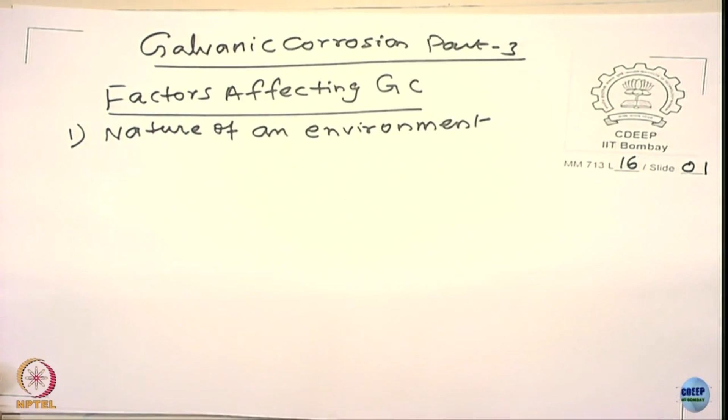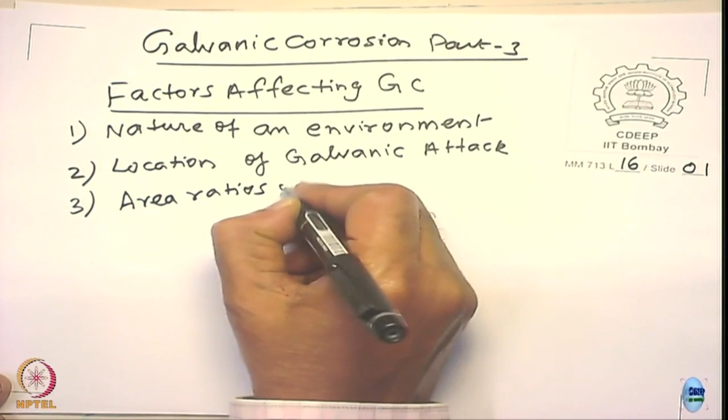The more obvious one is the nature of the environment. The second is location of galvanic attack. The third, since we are using two different metals with different chemistry and different electrochemical parameters, the area ratios are very relevant, very important - the area ratios of anode and cathode.

So we shall go into details and try to understand. If you understand the factors controlling galvanic corrosion, it will be much easier for you to devise means of controlling it. That is the whole basic idea of analyzing these factors.

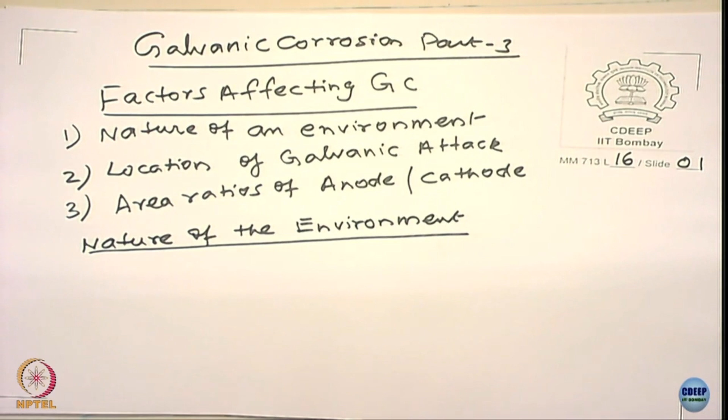Let us start with the nature of the environment. We can say as the severity of the environment increases, the galvanic corrosion also increases. The vice versa is also true - if the environment is quite mild, then the galvanic attack becomes relatively slower.

Now we can have a few illustrations to demonstrate how the severity of the environment influences this. I give two examples: corrosion in magnesium sulfate, which is relatively a mild environment, and corrosion in sodium chloride solution, which is relatively a severe environment. Take the two metals steel and zinc. If you look at the corrosion rate of these two metals in uncoupled and galvanically coupled conditions, you will see how the corrosion of zinc, which is more active, would change.

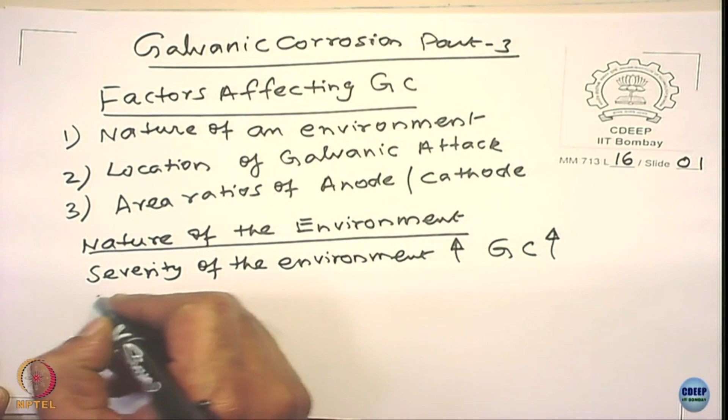This would change significantly if the environment becomes very severe. This data is taken from the Fontana book, just to give you a feel for it. Let's take the case of 0.05 molar magnesium sulfate. Zinc virtually does not dissolve and corrode, while steel corrodes.

When you galvanically couple these two, you notice that zinc corrodes at a higher rate and steel in fact shows a marginal improvement in weight - a weight gain. But this weight gain is not because of growth of steel or iron. It primarily happens because when you make a metal the cathode, the pH goes up and some deposition occurs. So if you clean them up, you would not see any significant increase in the corrosion rate. This rise in weight is not related to metal deposition here.

As opposed to this, you take 0.05 molar NaCl solution - both the steel and zinc corrode. Both corrode, and in fact the corrosion rate is almost the same, primarily because it may be diffusion controlled. The diffusion control does not depend upon the corrosion tendency of a metal.

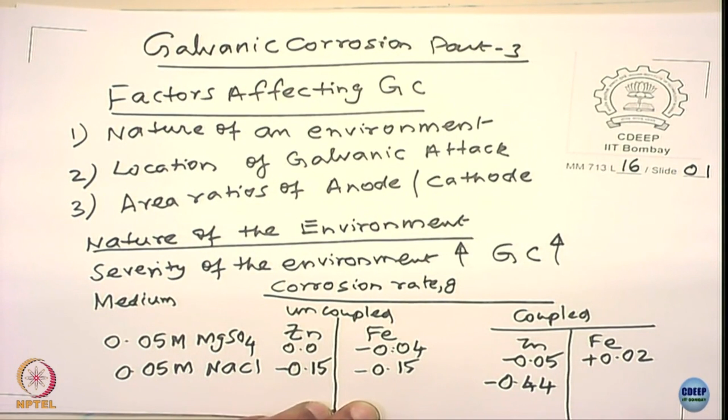In the coupled conditions, you see that zinc corrodes at a much higher rate and steel does not corrode at all. So the corrosion rate of the relatively active metal here, the zinc, is very much dependent upon how severe the environment is, and sodium chloride proves to be very aggressive in nature.

There are also cases where the galvanic tendency of the metal changes if you change the temperature or concentration. It is possible that at a given temperature, pressure, or concentration, one metal acts as active and the other acts as noble. Slightly change the temperature, and the metal which is active turns into a noble metal. These things have practical relevance and importance.

We give some examples. Let us take the case of steel versus zinc here. And all of us know that in galvanized steels, the zinc coating sacrifices itself and the steel gets protected.

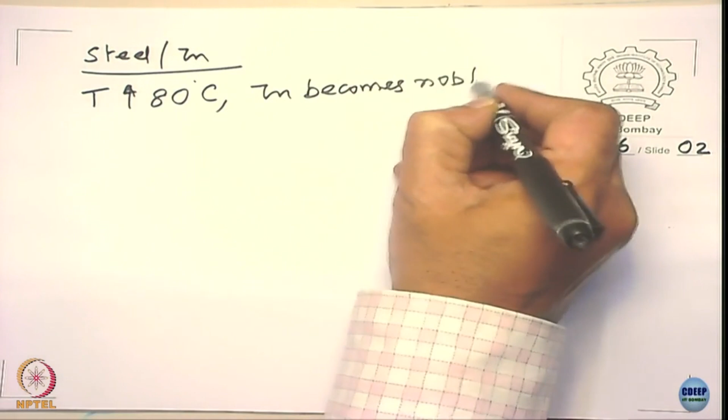But if the temperature of the coating is increased, if the temperature goes beyond 80 degrees Celsius, zinc becomes noble and iron/steel becomes active, and this is called galvanic reversal.

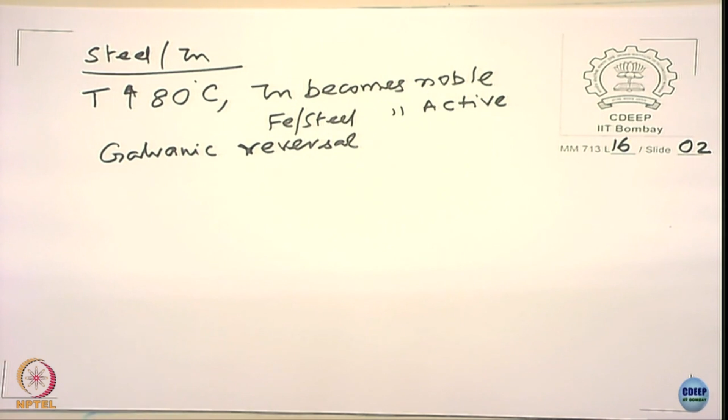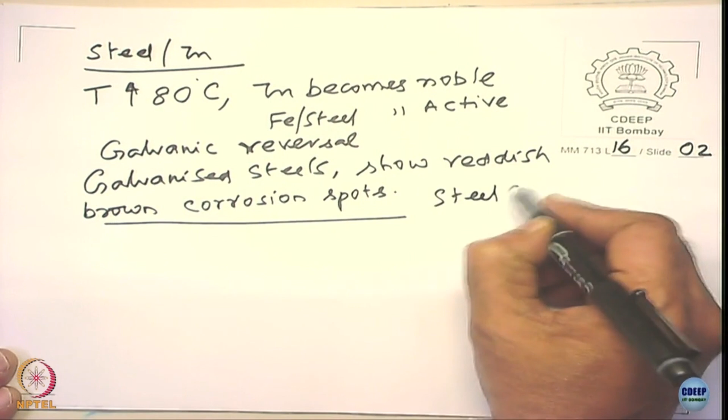Such a phenomenon has practical problems. One is, we have seen that the galvanic corrosion of steel, if the steel is galvanized - here steel corrodes. One more example which is relevant, which we will discuss a little later, is the application of zinc as sacrificial anodes.

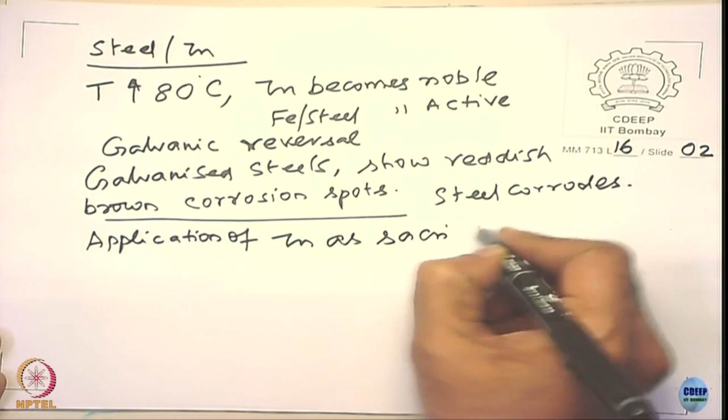In a cooling water system, it is not possible beyond 80 degrees. Why? The zinc starts passivating, it loses its protective nature, in which case you may have to use magnesium, or anyway zinc is not going to work.

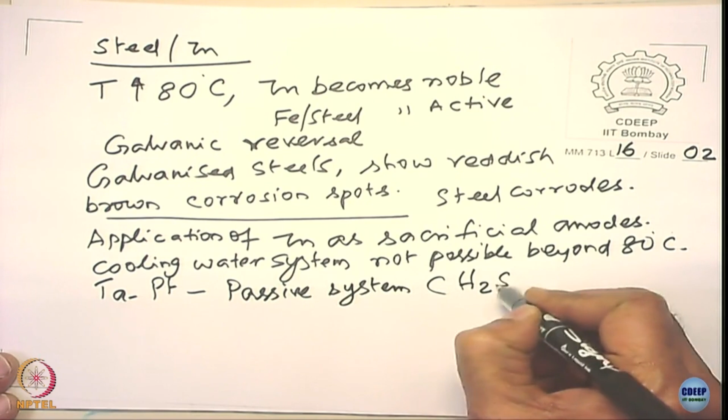There are a few more examples which are very interesting. You take tantalum and platinum. This is a passive system. This is, let us say, sulfuric acid, and you do not see any galvanic current until 110 degrees Celsius temperature of the sulfuric acid. You have no problem, you can have platinum and tantalum coupled together, it does not give any galvanic corrosion rate at all.

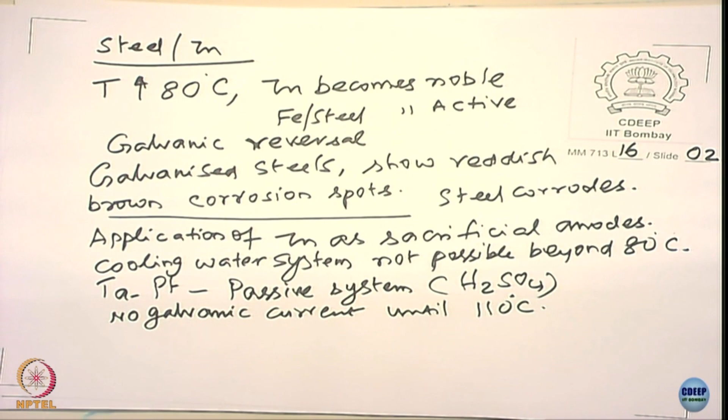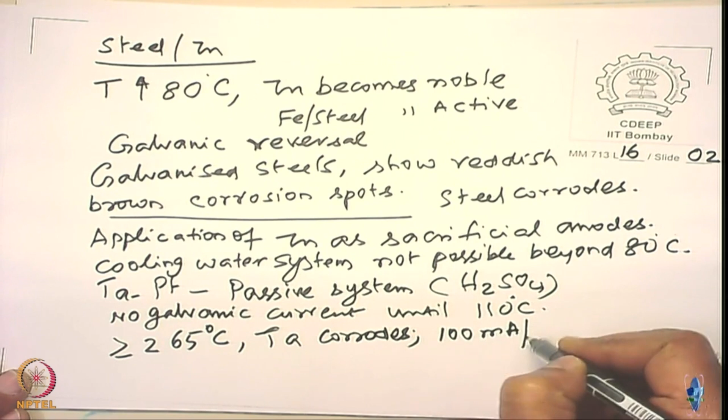But if you raise it above or equal to 265 degrees Celsius, tantalum corrodes, and you will see a galvanic current of about 100 milliamperes per square feet. The tantalum turns into an active metal, whereas the galvanic corrosion was not operating at all before.

As one more practical example, the tin-coated steel containers for storing food, like beverage cans. If the food, let us say juice, for example orange juice or apple juice, decomposes and gives rise to organic acid, it attacks tin complexes, and the tin becomes active. Otherwise, tin is a noble metal compared to steel, so that is not going to work. Now the tin starts corroding because of the complexing. So such kind of galvanic reversals are of importance in industries and should be studied very well before you select the system.

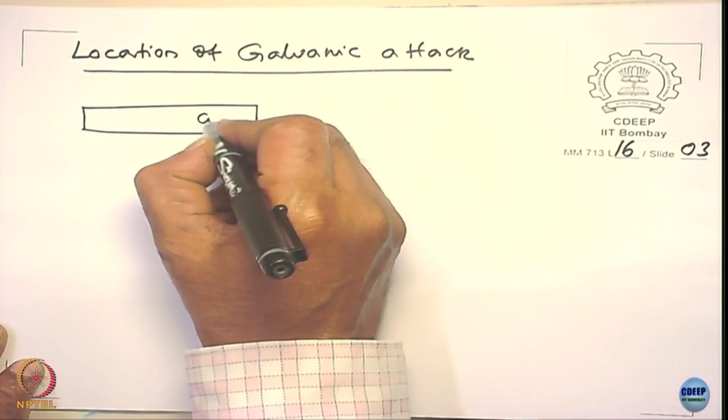Let us look at the location of the galvanic attack, it has a very important relevance for us. Let us take an example of copper and steel, exposed to the environment. You know that this is the anode, and electrons move like this, and there is going to be H plus or oxygen, whatever comes, and hydrogen is getting liberated. Agreed? This is what happens.

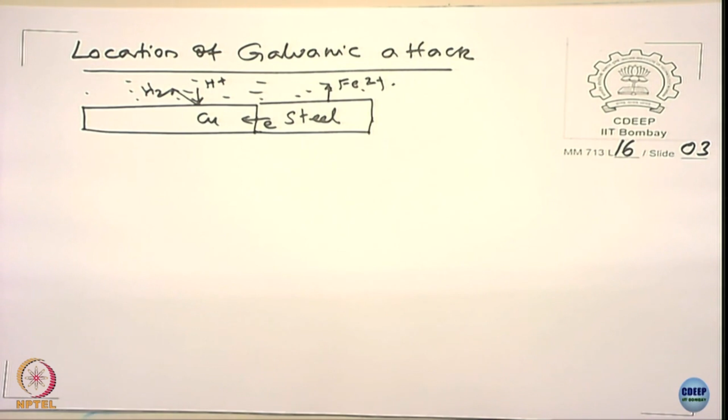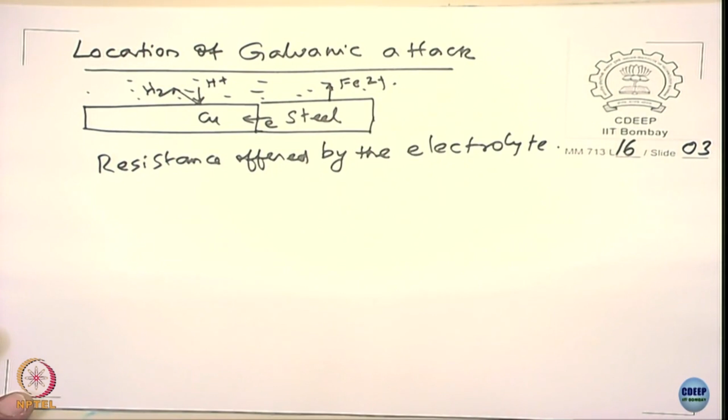Now you tell me, where will the galvanic attack be severe in this case? The most severe is at the interface, right? The galvanic corrosion will be more severe at the interface. Why is it more severe at the interface? The answer is correct, but why? Consider: the potential difference between this point and this point remains the same, that is going to be almost independent of distance. What comes into the picture here is the resistance offered by the electrolyte. So the current flows like this: electrons flow this way and current flows in the electrolyte.

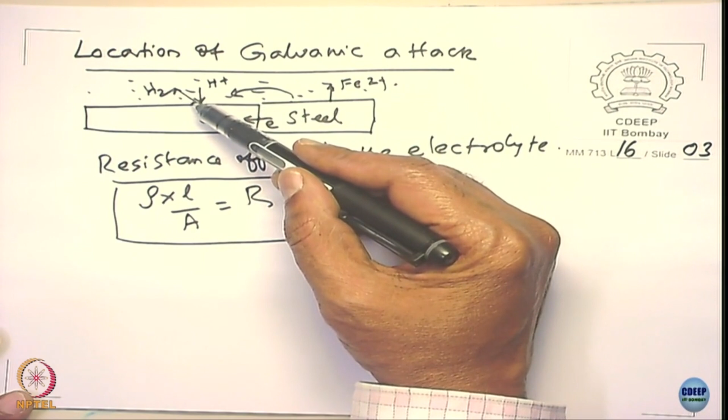So if the current has to flow from this end to the farthest end, the resistance increases, and the quantum of current that reaches this place will be less compared to the quantum of current that reaches the interface. Because the resistance depends on what? The resistance depends upon rho L upon A, that gives you the resistance: the resistivity of the electrolyte, the length over which the current flows, and the area or cross section over which the current flows. So as the distance increases, the quantum of current that flows reduces, and the amount of corrosion current decreases from this point to this point.

So that means if the resistivity of the electrolyte is increasing, what is going to happen? Assume there are two electrolytes, one with higher resistivity, the other with lower resistivity, and you observe the attack, and what kind of attack difference you will find. The same copper and steel, one with higher resistivity, the other with lower resistivity. What kind of differences do you see by just observing them?

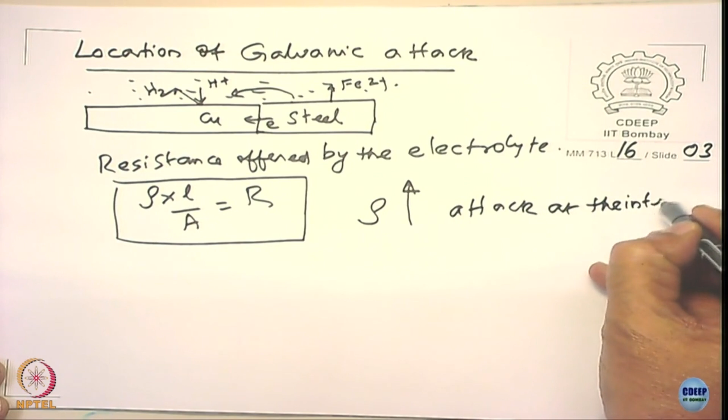That is true, but between the two, the resistance is higher in the electrolyte, in that case it will be higher. So when the resistivity is more, the localized attack is more, and the attack is confined to the interface, right, more than the attack at the interface phase becomes high.

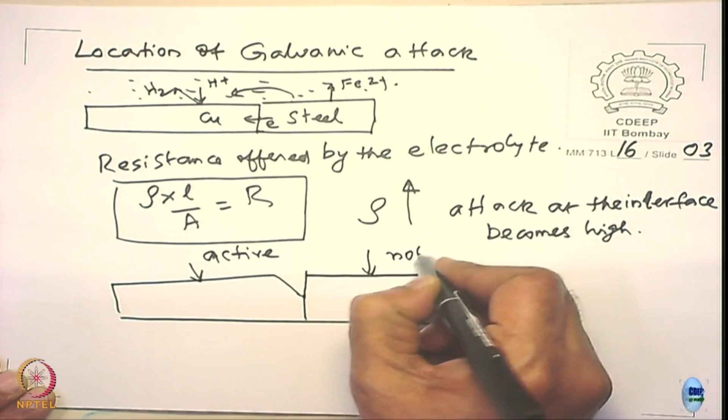In fact, this is one of the characteristics of galvanic corrosion. If you want to diagnose a problem, if you see in the industry that there are two different sets of metals which are electrically shorted, and you want to show that there is galvanic corrosion, the first criteria is that the interface should have a deeper attack. In fact, the attack will be something like that: this is your active metal, your relatively noble metal, right.

On the other hand, assume that I have a pipeline, and in that pipeline there are two different metals. One side is relatively active, the other side is relatively noble. The fluid is going inside and it is corroding. If the corrosion is away from the interface and is severe, would you call it galvanic corrosion? And it happened in the active metal, right? Would you call it galvanic corrosion? Do you get my question?

The pipeline carrying corrosive fluid has got two parts. Part 1 is active metal, part 2 is noble metal, and they are electrically shorted at the interface. The pipeline leaks. You found that the leak has occurred at the anodic member of the pipeline. But you also notice that the leak is not at the interface, it is about 10 centimeters away from that, or 5 centimeters away. Would you call that galvanic corrosion?

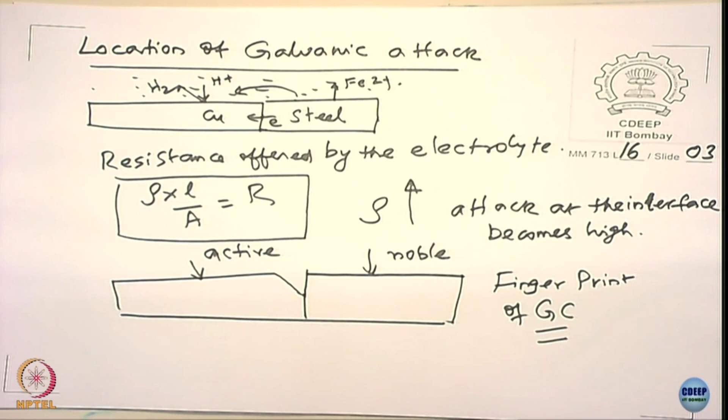Let us go into the next important aspect of it, the area effect. It is very easy to understand, and it is very impactful in designing structures to avoid galvanic corrosion.

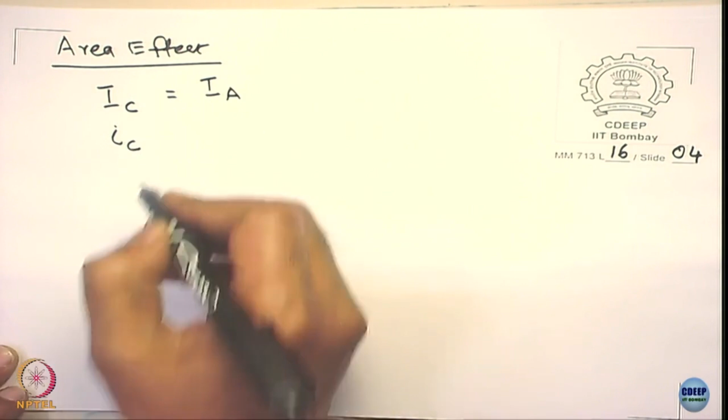Let us look at the mixed potential theory and see whether it helps us. We know that total cathodic current is equal to the total anodic current, right? It cannot really change. Now, what is this equal to? This is equal to current density multiplied by the area of the cathode, which is equal to current density at the anode multiplied by the area of the anode.

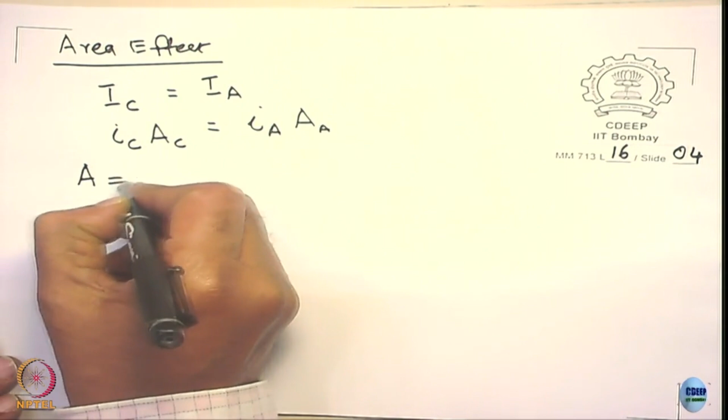Agreed? Okay, you know what it is, right? A represents area, and the other variables you are aware of. Let us rearrange this equation, equation 1, equation 2. See, what do you understand from this equation?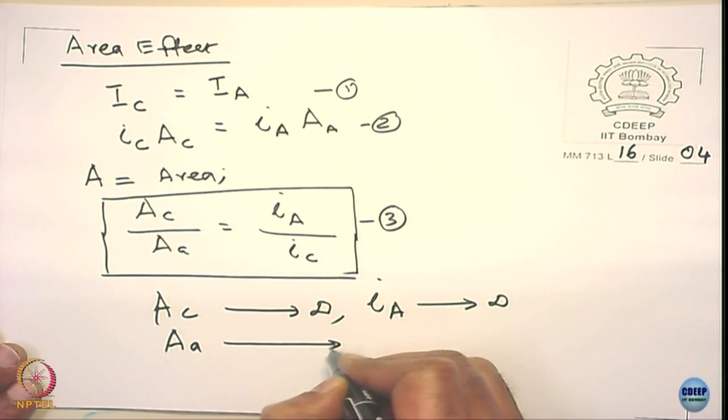If the area of the cathode becomes very high, the corrosion current density on the anode is going to be high. So that means if the cathode tends to become infinity, IA is going to tend to become infinity. When I say IA here, I mean the increase in corrosion rate due to galvanic action. On the other hand, if AA tends to become infinity, IA tends to become zero due to the galvanic couple.

Understood? So what does this really mean in practice? If you are an engineer constructing a component, what should be the design criteria? You should take care that when choosing materials, if you have no choice but to use two metals, you should always ensure that the anode is larger and the cathode is smaller. The vice versa could be a real problem. This can also be seen by the mixed potential theory.

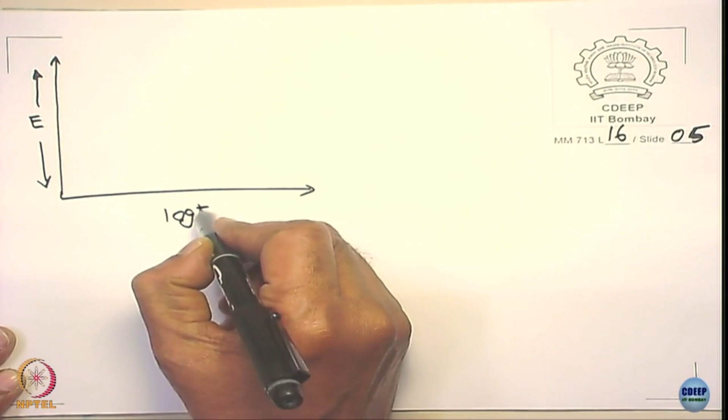Let us look at the mixed potential theory and see whether it is correct or not. I am putting log capital I here, not small i. Capital I means current, right. Assume that this is steel, and its ion going as Fe2+ in acid.

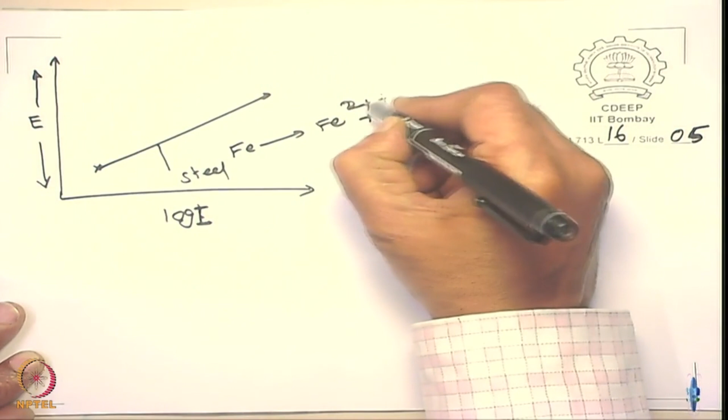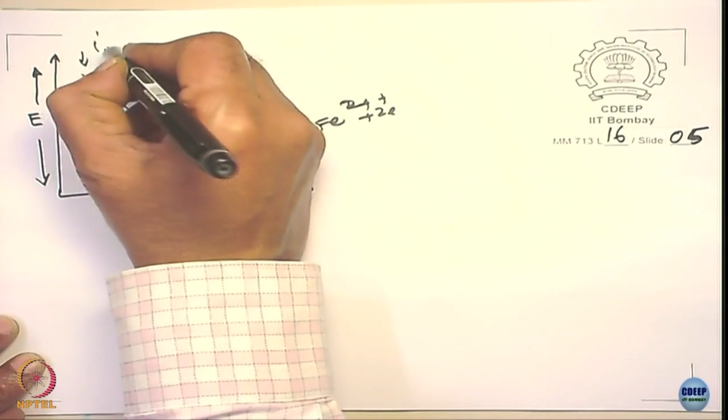I have the area ratio of iron and platinum equal to 1. I am not showing the cathodic curve corresponding to steel because the hydrogen evolution on steel is lower compared to hydrogen evolution on platinum, but you can show it here too. I naught H plus H on steel, then you can use platinum. This area ratio: steel is 1 centimeter square, platinum is 1 centimeter square.

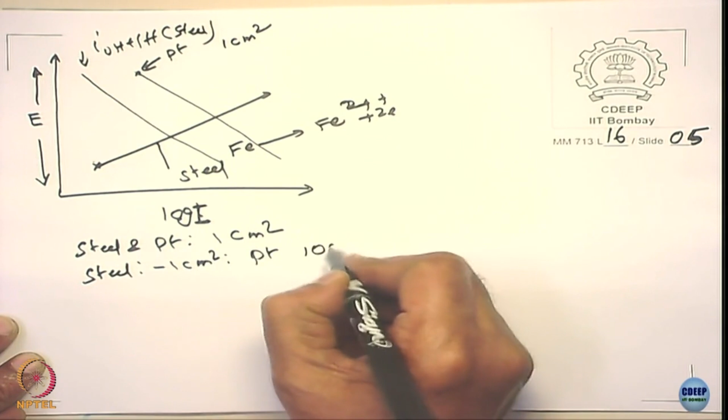I make platinum about 1000 centimeter square. When I make it 1000 centimeter square, please note a small change here - you cannot use I naught, it should be capital I, because we are talking about the actual area, not the normalized value, we are talking about actual current. So if you multiply by the area, it's going to be like this.

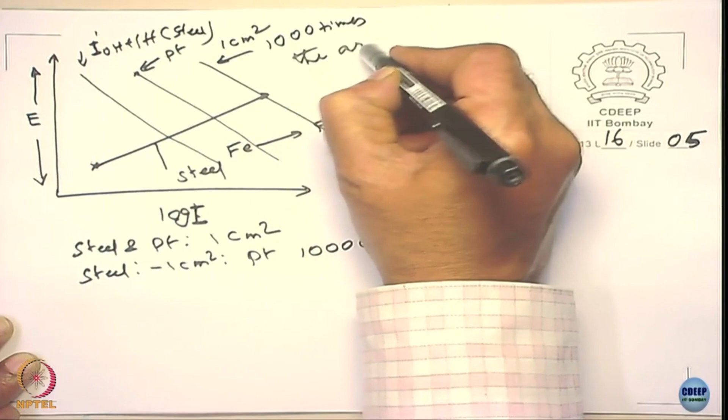This is 1000 times the area. So the corrosion rate would increase because of the galvanic action. And this has some practical implications. I just repeat the illustration given in Fontana's book - it is not too concentrated, but it is reasonably concentrated sulfuric acid.

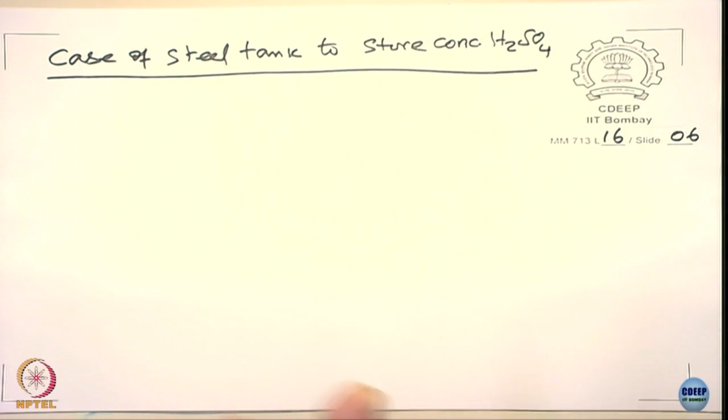See, very highly concentrated sulfuric acid, okay, you do not need anything. The steel offers very high resistance to corrosion, but with moderate concentration and dilute acids, the steel corrodes heavily in sulfuric acid. So how does the steel...

...become resistant to corrosion? You apply a coating, you call it a lining actually. You give an epoxy lining. The difference between a lining and a coating is the following: the coating is normally given to prevent corrosion of the metal, but the lining is given not only to prevent corrosion of the metal, but also to see that the product does not get contaminated.

So you may allow the metal to corrode, because you can replace it, but if the sulfuric acid has got too much of iron corrosion products, there is no use. So, the lining is generally meant to prevent corrosion to the extent that the corrosion products do not contaminate whatever process fluid you are talking about.

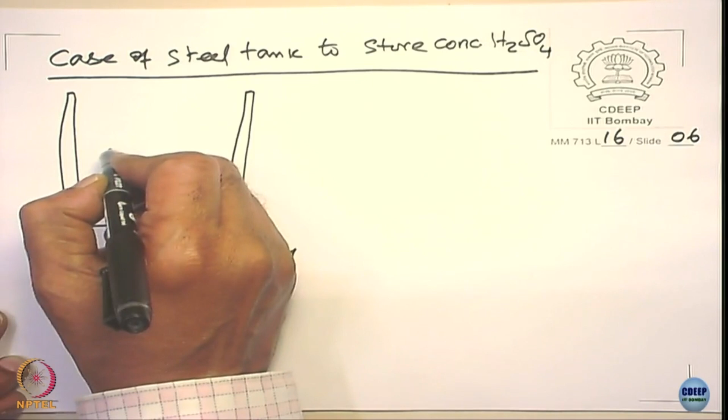Now, initially a steel tank was used, and they had an epoxy lining, and this is sulfuric acid. It is working well, okay. It gave a few years of service, okay.

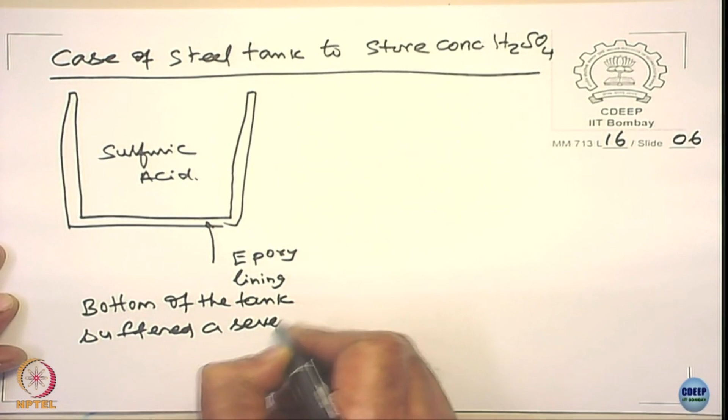There is no problem. But what happens is, there is always mechanical damage, people want to clean the tank. So when you start cleaning the tank, the bottom of the tank more often suffered severe corrosion, but it lasted for a few years. Seven, eight years it lasted.

And they found that the corrosion is more often on the bottom, more due to mechanical damage during cleaning. They thought they could line this tank with stainless steel. Stainless steel is harder and mechanically quite sound, and you do not have to worry about mechanical damage. When they wanted to do a lining of stainless steel, they thought, okay, let us not line...

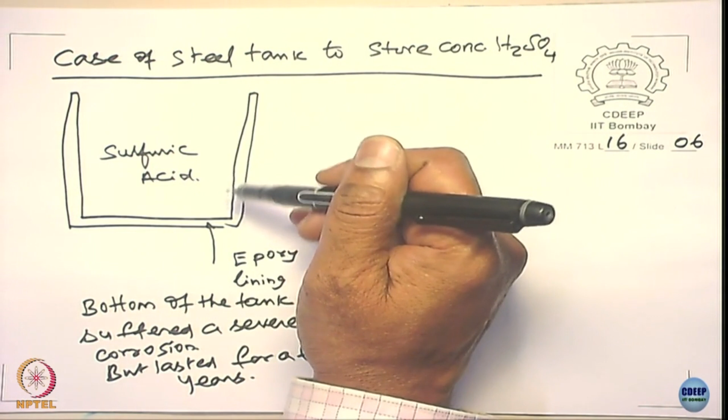...the tank completely because it costs more. See, many of the tanks are very, very big, right? You can save money by reducing the lining, since the corrosion happens anyway only at the bottom of it. So they started giving a lining in this manner.

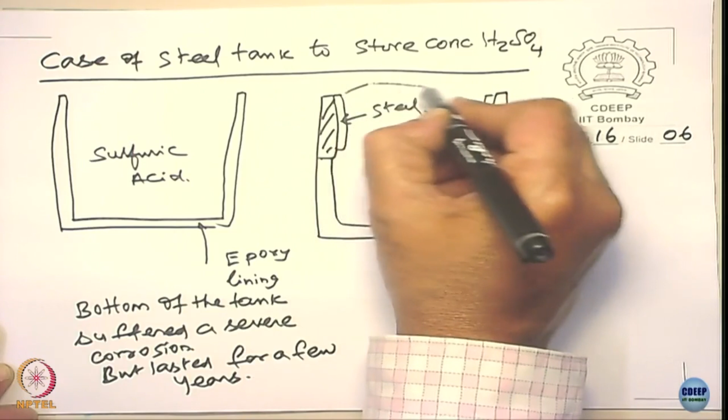They gave a lining to this, and the top portion was steel, and the tank is coated. It is not really well drawn anyway, it is a paint. This is painted.

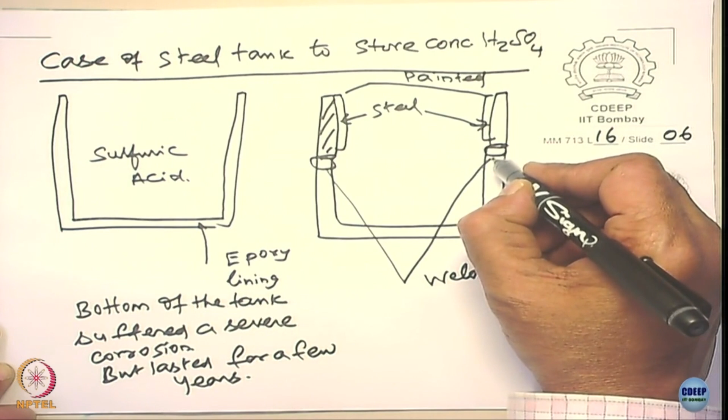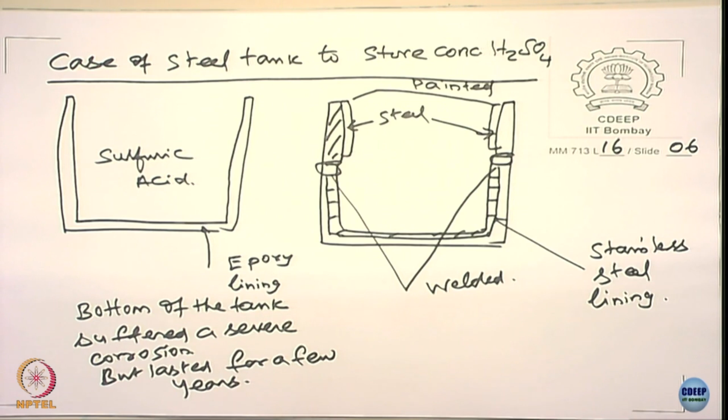How do you line it? And this is a place you weld, right? Welded, and you can see, okay, you can make it a little more neat. This is stainless steel lining. Stainless steel lining is done. Interestingly, this is sulfuric acid.

Now, the tank failed, very shortly. And where did it fail? It failed at the weldment. Now, you see here, you spent on stainless steel, a very expensive lining. Despite that, the life is very short.

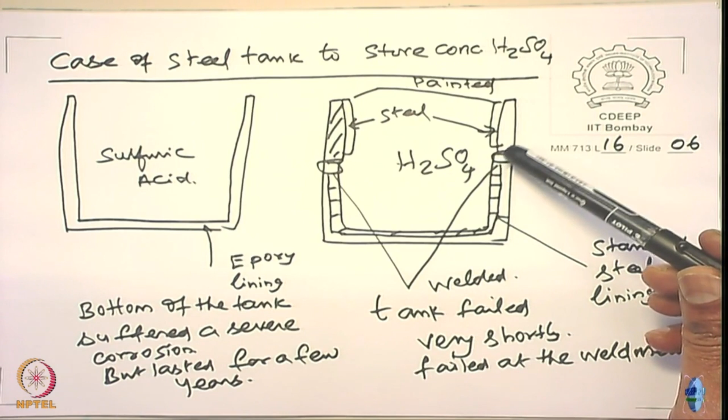Very interestingly, the guy diagnosed saying that the painting is bad, and so the tank failed because corrosion occurred at the paint, and this place is welded here, right? And when you weld it, painting is always difficult at the welded location. Normally you grind very nicely and then you paint. So the person said the failure happened because of improper painting, and they went on to say that we should redo the painting.

But some wisdom prevailed and they tried to look at why it failed, why it really failed. Before I go into that, can anybody guess or find out why it happens?

There is a small failure in the paint, so the area of the anode will be very small compared to the large area of the cathode. Fantastic. The paint can never be impervious, it is always porous. When the paint is not impervious, it is porous. Now what happens? There are very finite, small locations where you have an anode. Not only that, you have a lining which is stainless steel, which acts as a cathode. That cathode is of infinite area compared to the very finite anode below the coating defects. So, very highly accelerated corrosion takes place. So, the reason is simple. What is the reason? The reason is a defective coating, and then what happens? You have area of cathode upon area of anode tending to become infinity.

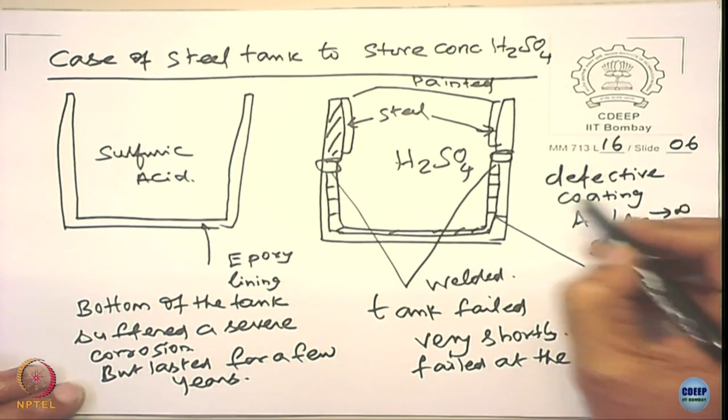Why did it fail? There are several such cases explaining why coatings ought to be given - only on the cathode if you cannot coat both, or you coat completely. Suppose the guy has coated completely both anode and cathode, then what happens? If there are defects in the paint coating at the cathode, even if small in number and small in area, there's no problem.

This leads to the understanding that if you have dissimilar metals, you should coat both the anode and cathode. If you cannot coat both, then we coat only the cathode. If you can coat only the cathode, you will have a very finite area of the cathode, so the galvanic corrosion becomes very minimal and you would not have any problem at all. So coat both anode and cathode, or if not possible, coat only the cathode and not the anode.

So such surprising conclusions come out of understanding the parameters affecting corrosion. We have now seen the factors affecting corrosion, and you should be able to propose how to prevent or mitigate galvanic corrosion. I want a very quick answer - let's move forward quickly. How do I mitigate galvanic corrosion?

Avoid use of dissimilar metals - that is simply not possible in many cases, like heat exchangers. If I have to use them, what is the first criteria? What do I look for first? I look for the anodic area. But if I can choose metals, I look at the galvanic series.

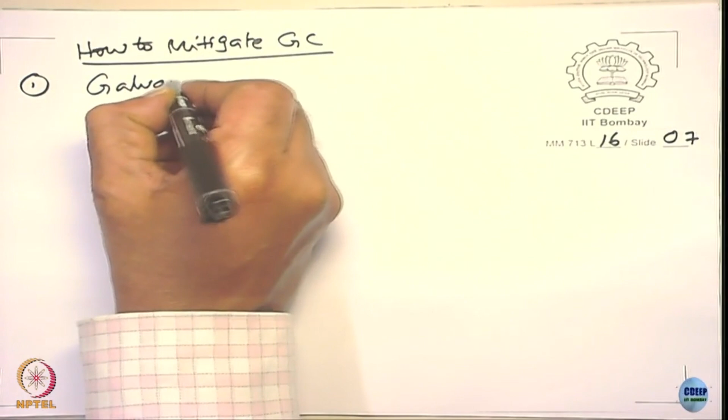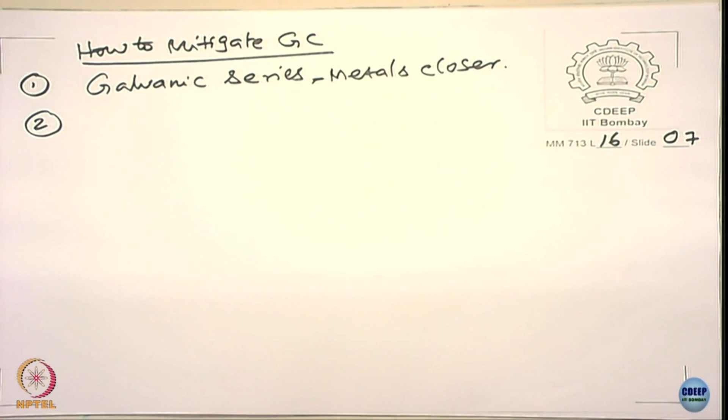Choose metals closer in the galvanic series. What more can I do? I can also look at higher anodic to cathodic area ratios, where possible, you can look for a higher anodic to cathodic area ratio. Then what happens?

I can isolate electrically - I can insulate electrically. Please look at this where possible, it may not be possible everywhere. What else can I do?

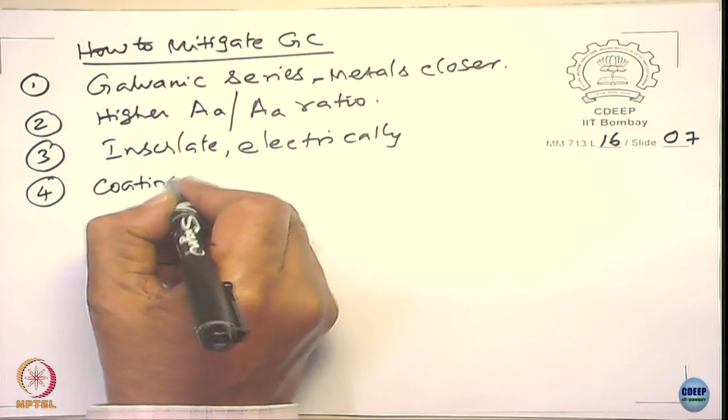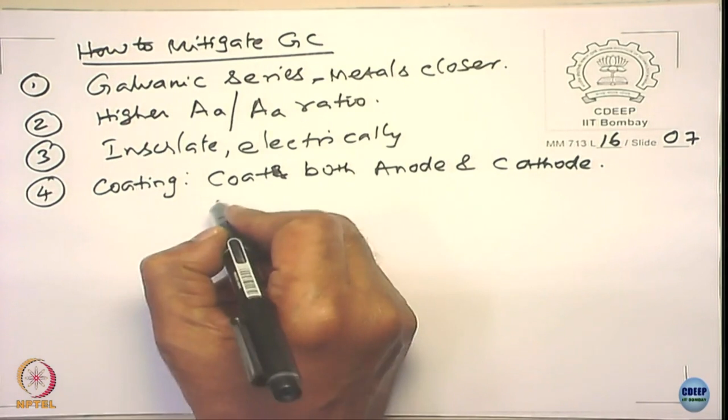Coating, right? Coating - it's an important lesson here. What is the lesson here? Coat both anode and cathode. If not possible, coat the cathode.

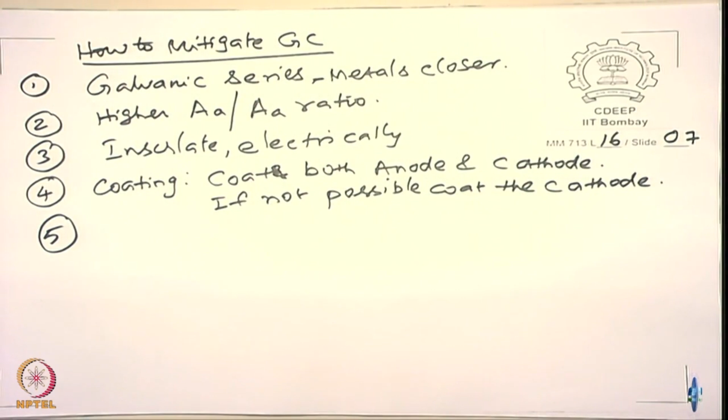We also had one more lesson in terms of effect of environment on galvanic corrosion - more severe the environment, more severe will be the galvanic attack. So how do I reduce the corrosivity of the environment? Use inhibitors. This is done in cooling water systems, where people add inhibitors.

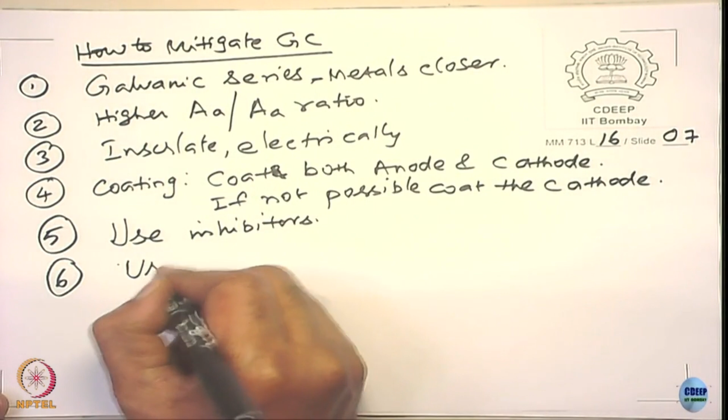What more can you do? You can use a third metal, one that is active to both. This is used widely in industry, mostly practiced this way. I've given this figure before - it's a heat exchanger, called a header or water wall box. These tubes are generally stainless steel.

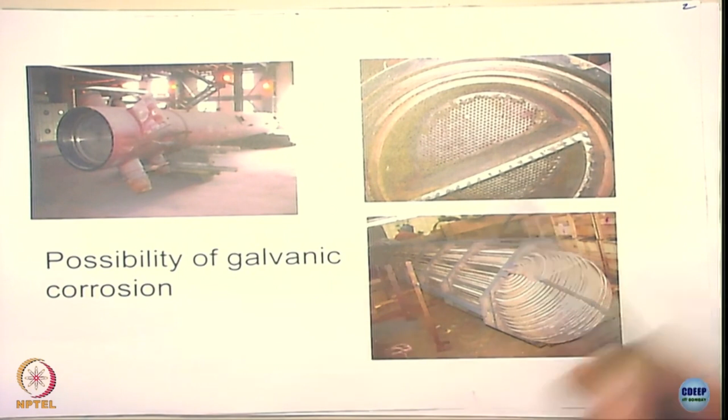There is galvanic corrosion here. How do I control it? In these places, you can use zinc anodes. When I weld these places with zinc anodes, the steel, though active to stainless steel, is rendered noble with respect to the zinc. So the zinc corrodes instead - for a couple of years there's no problem, and you can replace the zinc anodes periodically. This is done widely in industries, it is not uncommon, to reduce the corrosion of the active metals.

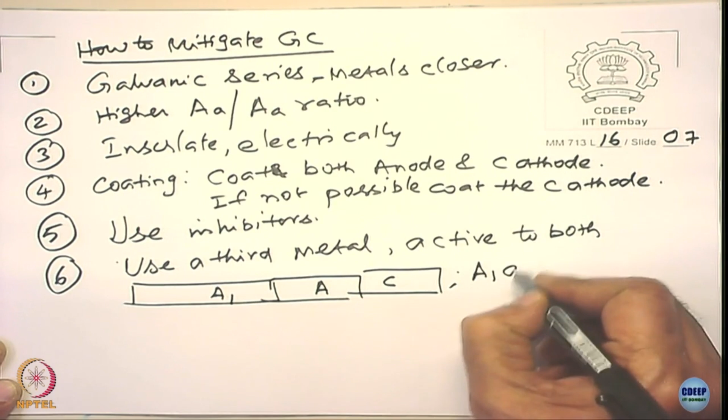So using a third metal means: this is your cathode C, and this is anode A. You use A1, which is anodic to A, and C is cathodic. So you can replace this A1 all the time whenever you find this anode is dissolved - it's a sacrificial one.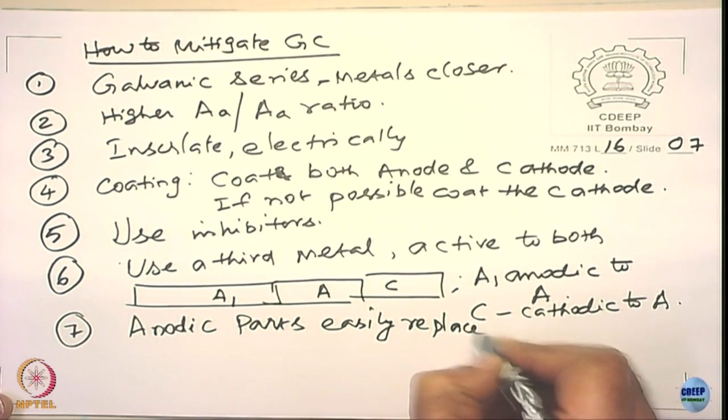You can also make the anodic parts easily replaceable - you can design that. We've given some 7 or 8 such techniques. Not necessarily all of them will work, depending upon the particular application - you may use a combination of one or more. The idea is that the cost comes down and there is reliability and safety in the system. So that is the engineering aspect of techniques used to avoid galvanic corrosion of metals.

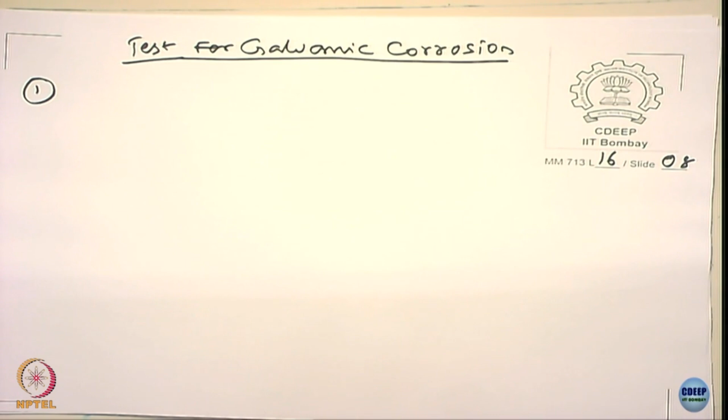So we are talking about mitigation. Let us go to the last important one - how do you test for galvanic corrosion? What testing would you like to do? The most simple test - what would that be? If I give you two metals, I want to know if they are compatible or not, or if I give you three metals, you find out which two are most compatible. I want to do a very quick test - what test will be useful?

Suppose you studied all parameters for half a dozen metals given to you, but you don't have much time, and you just want to choose two of them, even though all six satisfy the requirements. First, you can determine the galvanic potentials, right?

This I call Ecorr. In a given environment, you just measure it, and you choose those two metals which lie close in Ecorr values. So Ecorr is one important parameter.

But it does not give you the corrosion rates. So if you want to determine the corrosion rate in the galvanic systems, what parameter do you use? Will icorr of each of them work? I give you icorr of metal A, icorr of metal B, will that be useful? Do you think you can use that?

Would that be useful, or not useful? If useful, how is it useful? If not useful, tell why. We need to know that corrosion is happening. So icorr by itself is not useful, it cannot tell you which of the two will undergo corrosion. It does not even tell you which of the two will be anodic in nature or cathodic in nature. So, not useful.

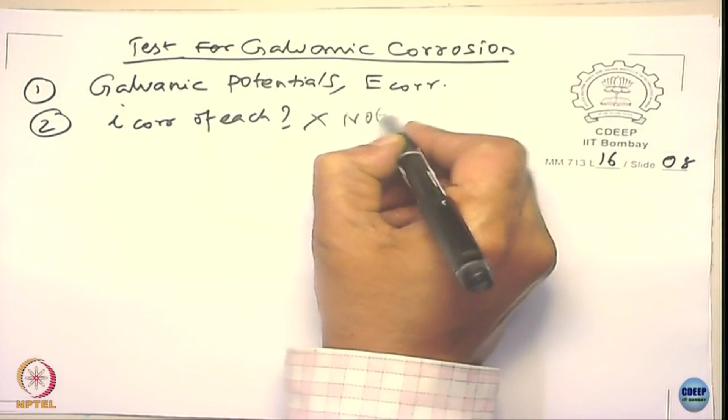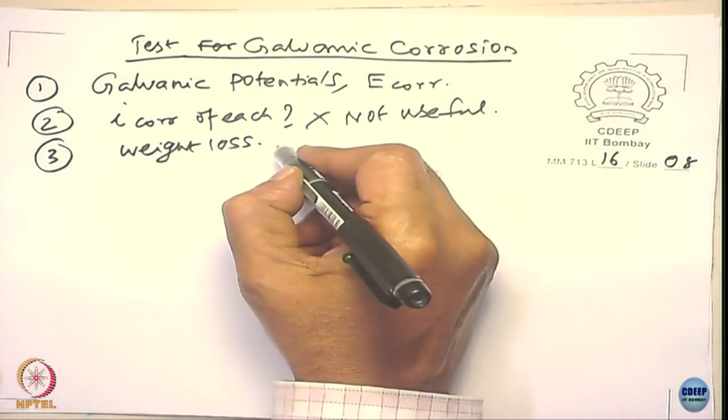Okay, I can do a weight loss method. What I can do is short both of them together, and I can determine the corrosion rate. I can just short both the metals and determine the corrosion rate.

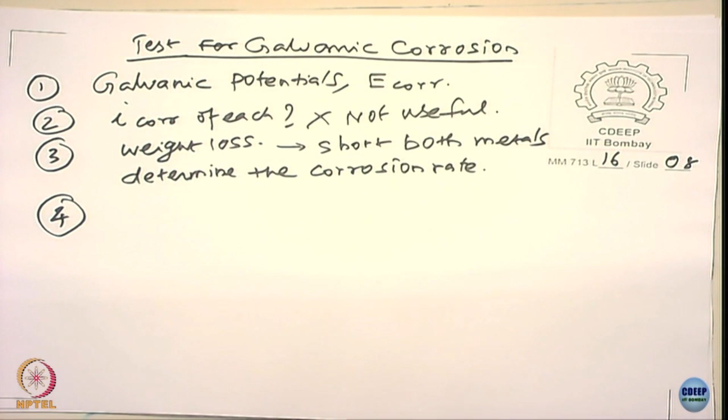This is time consuming, it takes more time, right? What I can do, if I want to use Faraday's law, and I just give a clue, and I want to find out what kind of corrosion rate - I give you half an hour, assume the system is stable. In half an hour, I want to find out the galvanic corrosion rate. What parameter do you measure?

Assuming that the system becomes stable, of course, what do you want to measure? I can measure galvanic current, can't I? Just have metal 1, metal 2.

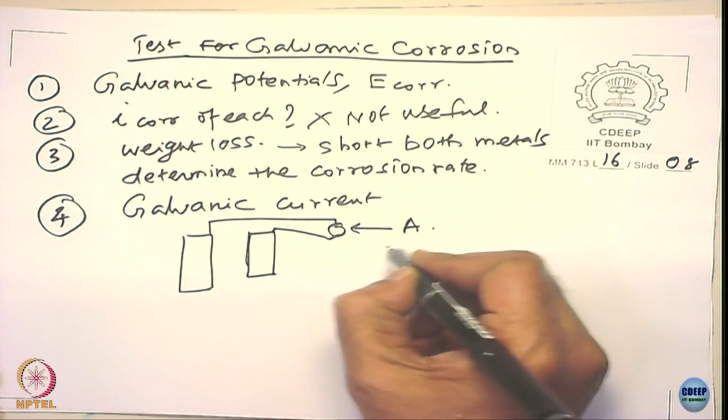The only problem here is I should use a zero resistance ammeter. Otherwise what will happen? The ammeter itself will offer resistance, the current flow will be reduced. So use a zero resistance ammeter, you can do that. It is a quick method, it may not take as much time as the weight loss method, but these two techniques suffer one problem.

What is the problem? The galvanic corrosion rate depends on what? Does it depend only on two different metals, or depends on anything more? Anything more that will affect the corrosion rate of the active metal?

Environment is known, that is given to you, you use the environment only. Tell me what that is - area is going to change, right? If you are going to change the area, then the rate of attack of the anode is going to be different. So there is going to be one more effect, which is the area effect.

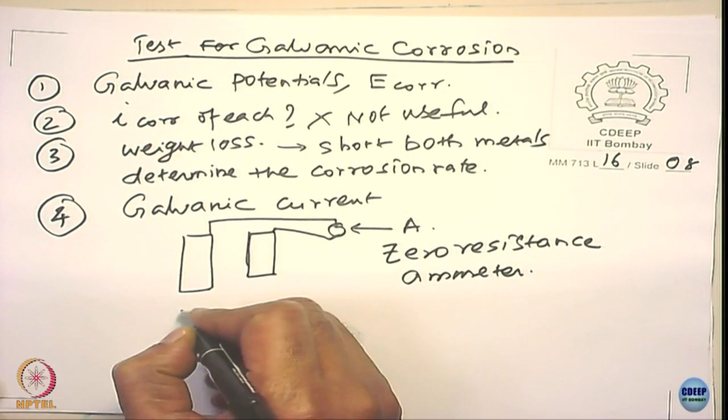So when you do a test, you have to ask: what is the area ratio in the actual field? I need to choose that area ratio, otherwise the corrosion rate so measured will not reflect the corrosion rate of a given metal in a given component. So area effect is a very important one. You may have to do several tests to find out what happens to the corrosion rate if the area effect is changed. That can be circumvented by a simple technique called the electrochemical technique.

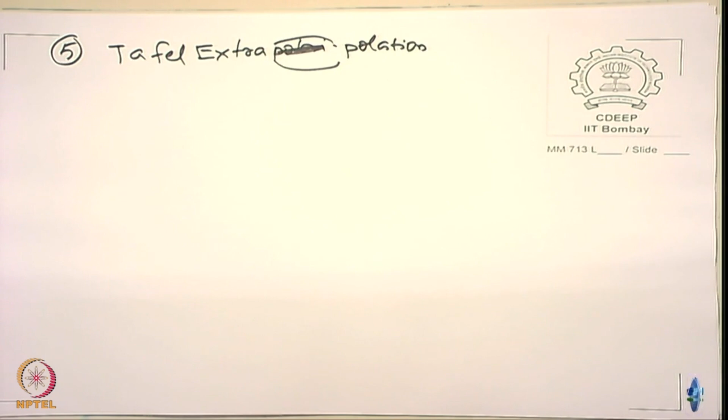You can use Tafel extrapolation. I hope you understood what I am trying to say. How do I determine this? I carry out only one test for the anode and one test for the so called cathode, and I use that data for all variations in the area.

Can I? I give you only one data for the anode - both cathodic curve and anodic curve - and I give one anodic curve and one cathodic curve for the noble metal. Now I say, please use it for different area ratios. Possible? Not possible.

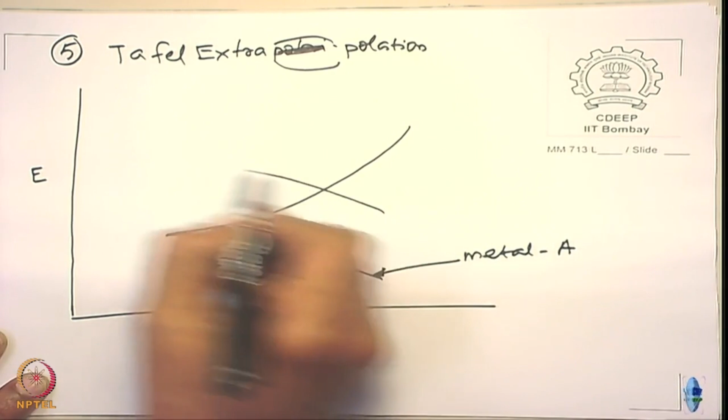So, I carry out an electrochemical experiment, right? I scan from one potential to another potential, and I get this data - current density versus potential. From this, can you determine the galvanic corrosion rate if the area ratios are changed?

Assume that the cathode becomes 100 times more in terms of area. What happens? What do you do in that case? You multiply this by 100 times, right? So you don't plot small i, you plot current here, log current versus potential, and this you multiply by 100 times, and it moves over here.

Or if the anode - sorry, this is metal A, and this is the anode here, but the cathode - I'm sorry, this is the cathode in this case, right? It's a cathode here, it's an anode here. So you multiply this by 100 times, it moves here. If the anode is 100 times larger in size, then you multiply this current by 100 times, and you start moving up here. The same curve can be used to determine the galvanic corrosion rate of metals under different area ratios.

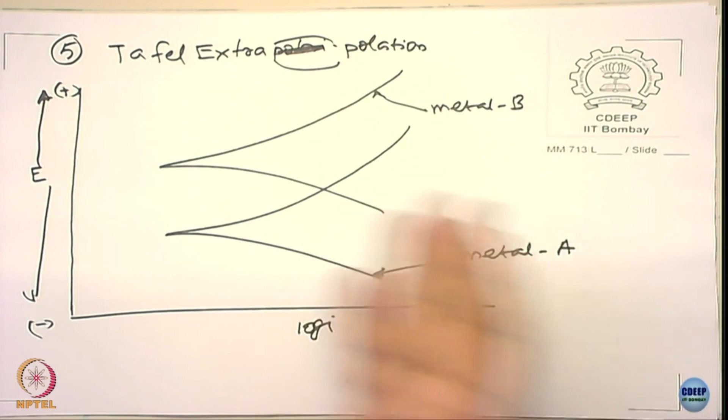All you need to do is get only one polarization curve for the different metals, and then you can find out the galvanic corrosion rate of the metals. So much easier. This is where you understand how Evans diagrams and electrochemical kinetics help you in many ways, even in testing - you can make it a very effective testing method. Do you have any questions?

With this we will complete our discussion on the galvanic corrosion rate of metals. We saw in the beginning that galvanic corrosion primarily occurs because of the galvanic potential difference between the two different metals that are in service. The galvanic corrosion does not depend upon the equilibrium potentials, of course.

We also looked at cases like active metal and noble metal, and two different active metals in passive systems. We saw the electrochemical parameters such as exchange current density, Tafel slopes, and equilibrium potentials - the factors that control the galvanic potential and the galvanic corrosion current density.